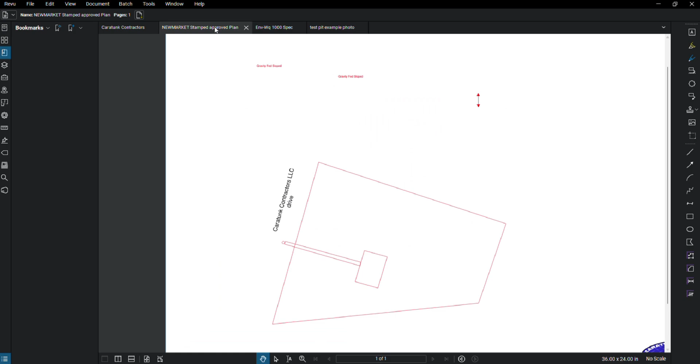First off, go into an example here of a system I installed in Newmarket, New Hampshire. What is a septic plan? A septic plan is essentially a site plan drawn by a septic designer or a civil engineer in New Hampshire, displaying the lot lines. So these are the boundaries of your property.

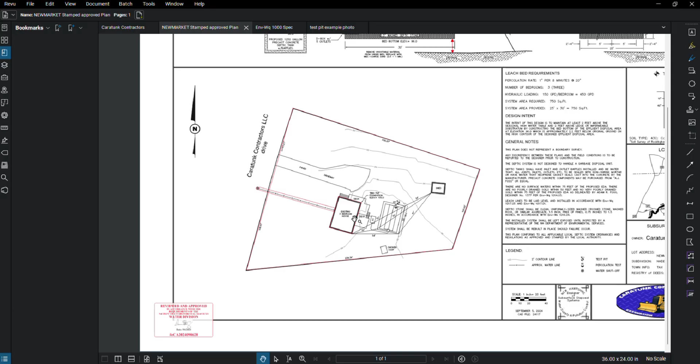The existing conditions of the lot, whether you have a house or you are building a house, there's still going to be existing conditions on every lot, whether it's your contours or a rock wall, or if there's trees over here in the corner, which there were on the system, or if you have a chicken coop, paved driveway, where the street is, that's kind of all on a plan.

Proposed elements will also go onto your plan. So on this system, we just replaced the septic system. There's no installation of a well or anything of that nature. So this was all existing right here. Existing decks, existing house, existing driveway. But on some plans, you will see a proposed well or a proposed addition on a house, or a proposed added driveway. Stuff of that nature will end up on your plan.

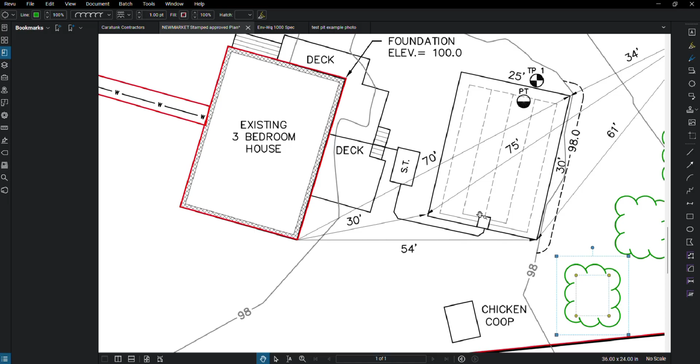And of course, the septic system is on your design. So it has the different components. You have your sewer line running out of your house and meeting your septic tank. So right here is your septic tank. From your septic tank, you have settlement, and out flows the effluent to your system. The basic system in New Hampshire is stone and pipe. It has a D-box in the middle, and it runs to perforated pipe, and it settles into the ground.

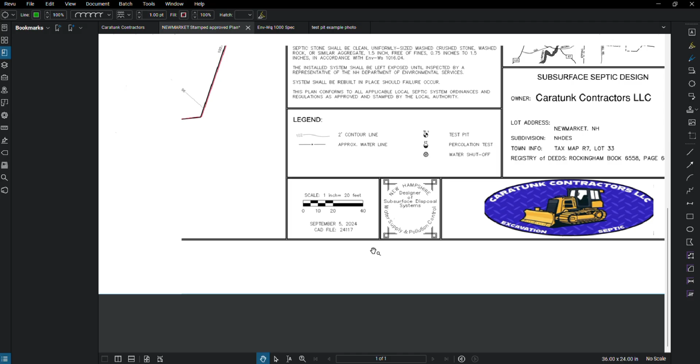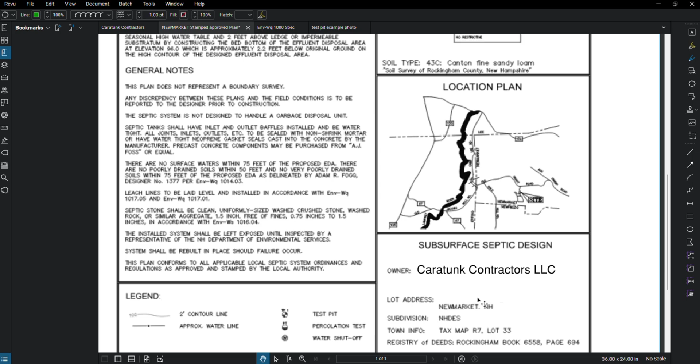You'll also see on your plan the stamp from the designer, the installation company, a scale, a legend. This helps you read where the test pit is, percolation test, water shut off. You'll see the approval from the state of New Hampshire, a compass with your northing, cut section from the side, test pit and its data, a location, owner information, tax lot, stuff of that nature, and your leach bed requirements, design intent, and general notes.

So the next question we've been hearing a lot of is, why do I need a septic design? First and foremost, anytime a system is installed or a leach field is replaced in the state of New Hampshire, a design and approval is necessary. This is a regulated trade within the state of New Hampshire, with installers taking a rigorous 4-hour test and designers taking multiple rigorous tests to complete and secure their licensing/permitting with the state of New Hampshire. This is regulated by the New Hampshire Department of Environmental Services.

The state wants to regulate these systems to ensure clean water and land. A poorly installed system can get people sick, ruin well water, and add disease/bacteria to our state's lakes, rivers, and oceans. Nobody wants kids getting sick swimming in their lakes. Nobody wants to get sick having a glass of water out of the tap. That's why we're here.

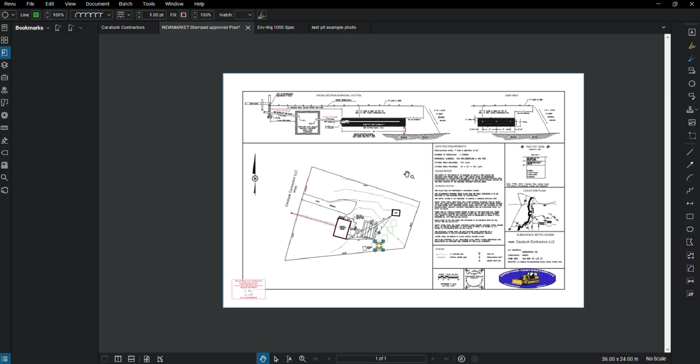Plumbers and septic installers are at the forefront of keeping our communities healthy, and we take that seriously. I seriously believe keeping bacteria out, separating your well water from your septic system, is important. We'll get into all that and how that comes into a design, but that's where we're coming from. That's how a lot of the guys we work with, our competition, ourselves, people in the industry feel about it. So that's why.

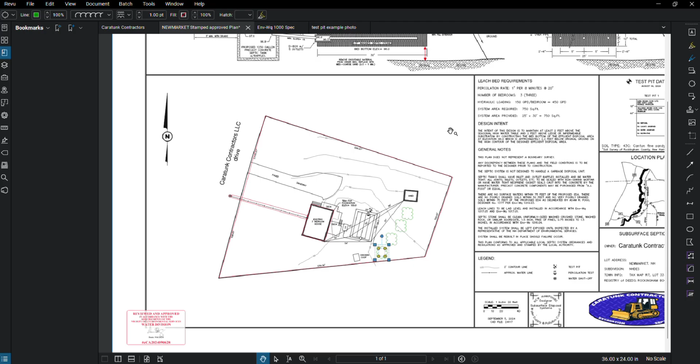Another question we ask here all the time is, what goes into a design? And why does that piece have to go there? Why do I have to have a tank right here is a question I hear all the time from customers. And it's a valid one.

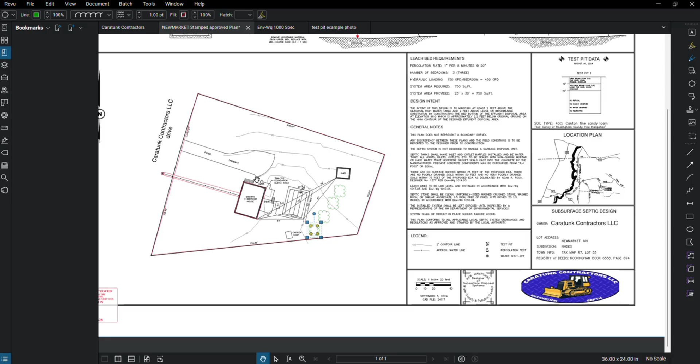So getting into this, essentially these designs are a giant puzzle. The puzzle starts with its boundaries. For example, this puzzle is roughly 227 feet long by 100 feet. So boom, you have the limits of the puzzle.

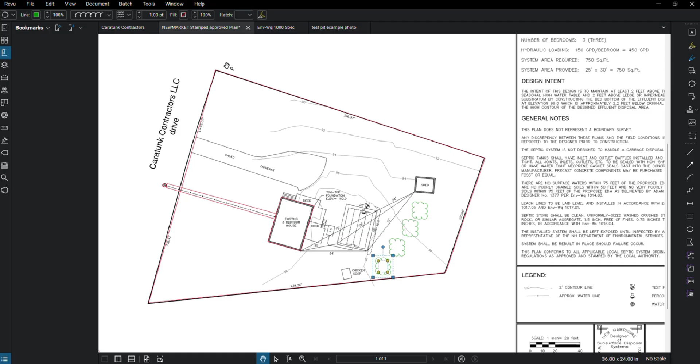Now, sticking with the puzzle concept, let's start dropping in some of the existing conditions. On this, we have a house, we've got some decks, we have a paved driveway, we have a well with a water line, we have a chicken coop, a shed,

we have a hill. This is kind of relatively flat area, and as you can tell with the contours, got a slope. So that's part of the story here. We got trees.

With all these existing conditions, the state spec plays a role. So everything on the plan is kind of formulated in offsets and sizing by the state spec from DES.

So if you go to the spec, you got about 130 pages of everything and anything that has to do with our line of work, including offsets.

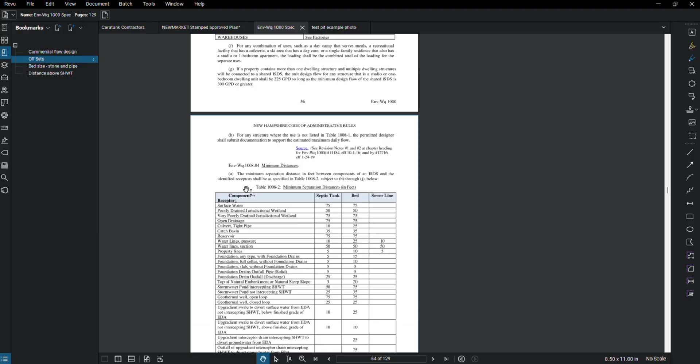So here in the spec, you can see they have offsets of how far your septic tank and your leach field and your sewer line have to be from lake water, property lines, catch basin,

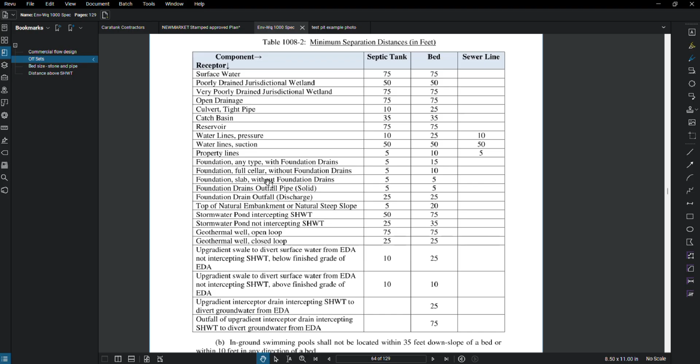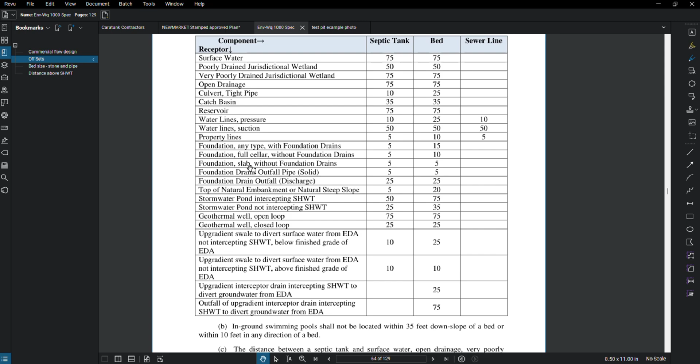you name it, a reservoir. It's in here. Your foundation. So going back to this, all of a sudden all your puzzle pieces have offsets.

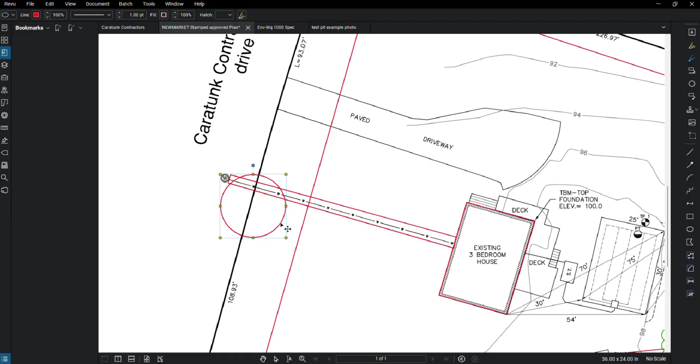And you can't put the components of your septic system within these pieces.

And now the puzzle's kind of shrinking, and you can only fit these different pieces in different places. Now it's kind of shaping up.

The next part of the spec is the size of your system. And sizing these puzzle pieces, essentially, like your septic tank. In the state of New Hampshire, 1 bedroom through 4 bedroom is a 1,250 gallon tank.

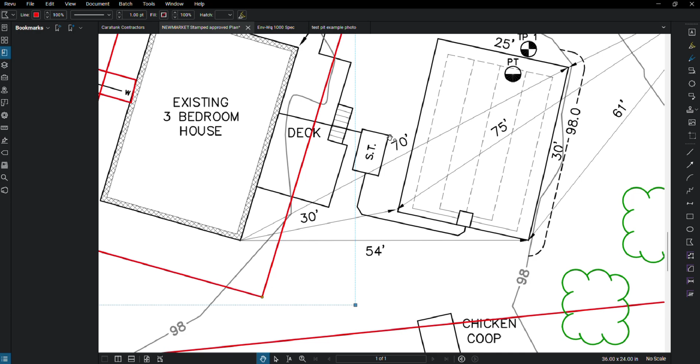And then for every bedroom you add after 4 bedrooms, it's an additional 250 gallon tank, adding 250 gallons to the overall tank size.

So for this example, we're going to a 3 bedroom house. We're in the minimum size. It's a precast 1,250 gallon tank. So we got the size of that puzzle piece.

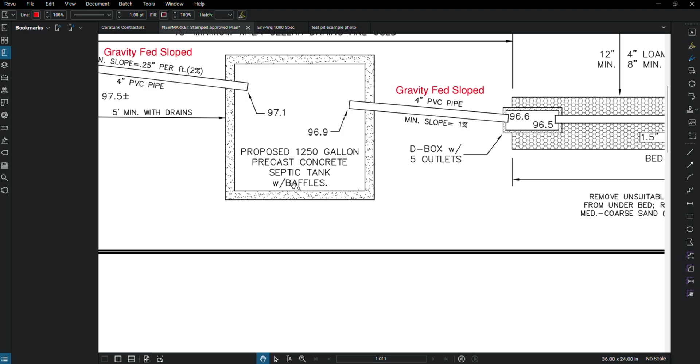Same thing goes for commercial. In the spec, they have a sizing chart on your size tank needed depending on what your usage is.

Same goes for the leach field. The leach field's a little two-pronged. So first, you want to calculate your flow rate. The flow rate is calculated in the spec based on your intended use and how large that intended use is.

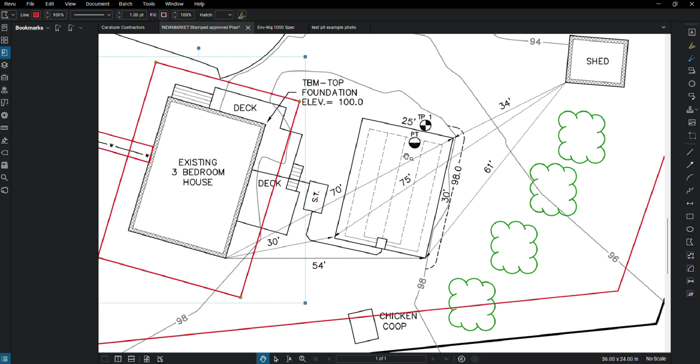So if we go over here, for residential, they have

on this table here the flow rates needed for a 2 bedroom house, a 3 bedroom house, a 4 bedroom house, and for each additional bedroom past a 4 bedroom house.

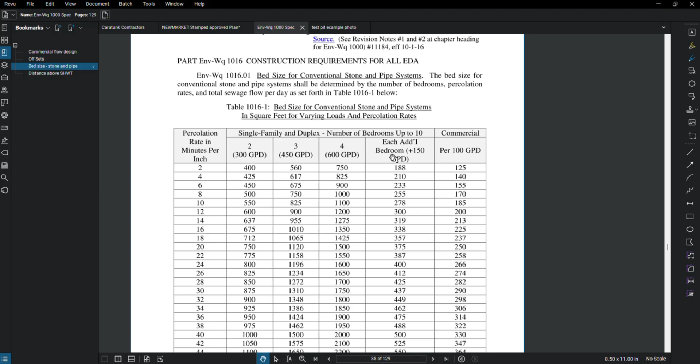They also have a table for how many gallons per day in a commercial use. Commercial uses are found in a different table within the spec.

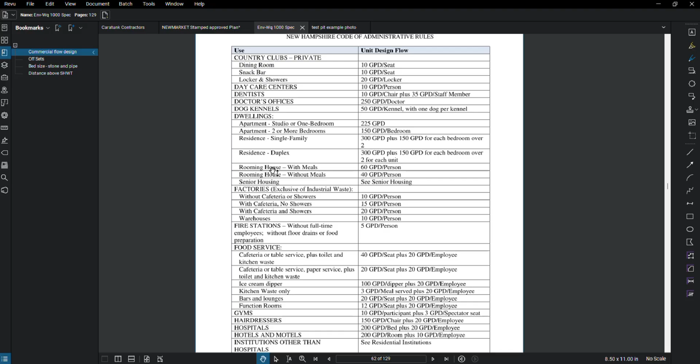They have everything in here. Country clubs, dentists, factories, fire stations, gyms, laundromats, motels, and these are based off of

the number of employees you're going to have, the number of seats at your restaurant, the number of machines in your laundromat, how many doctors, how many kennels for your dog kennel. Everything's in here.

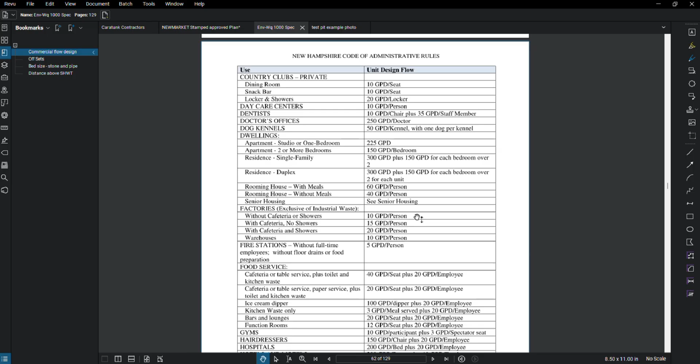You figure out what your usage is commercially, how many seats you're going to have or what have you for the scenario, and you can calculate your flow

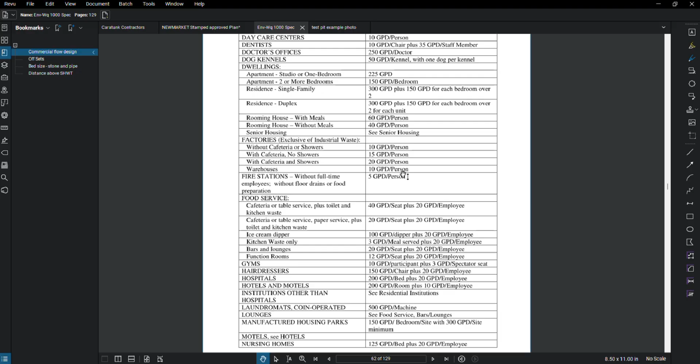rate per day. That allows you to go back to the sizing, and you can figure out this top part of your chart.

Let's hold on here. Do a quick highlight. Got 3 bedroom, 450 gallons per day. Hold that thought.

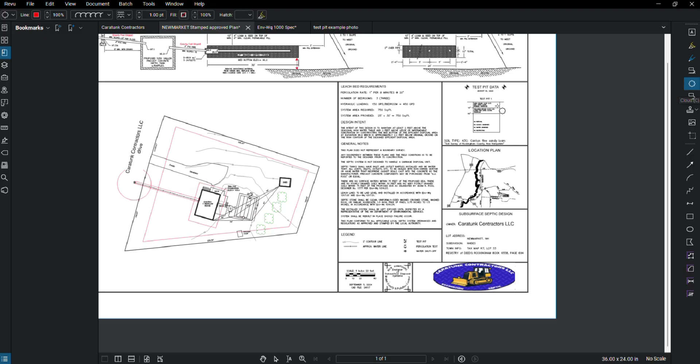Back on the plan, in the corner here, we have our test pit data. Test pit data is going to take a look at the soil type. It's also going to take a look to see if there's refusal. Are you going to hit bedrock? You're going to look at your seasonal high water table. Do you see any water when you observed? Is there a restrictive layer that you came in contact with?

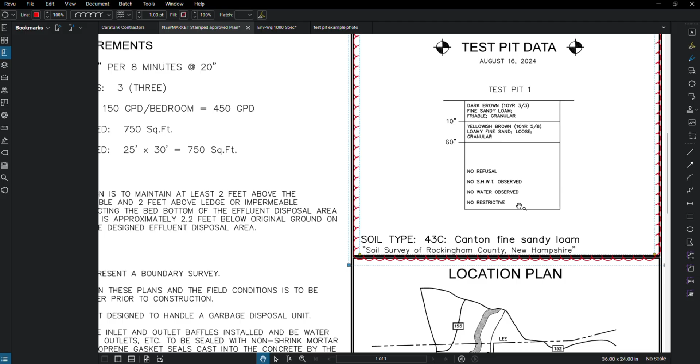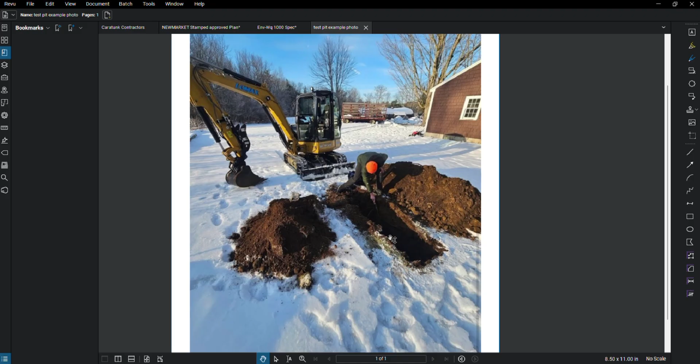Part of the test pit also is performing a percolation test. Percolation rate is figured after saturating the bottom of the test pit. So you're going to dig this hole about 4 feet deep, depends on the system generally speaking. You go a few feet down, you saturate the ground for an extended period of time per the spec, and then you fill up the hole again and you calculate how long it takes for the water to dissipate. In measuring that, in simplest terms, you figure out your percolation rate.

So on this particular system we did, the percolation rate was 1 inch. It dissipated 1 inch per 8 minutes. And you get this info right here.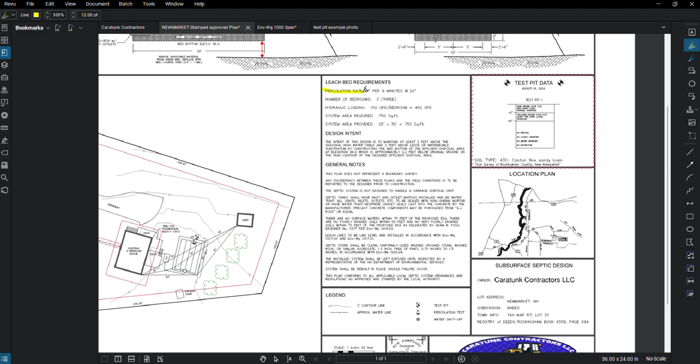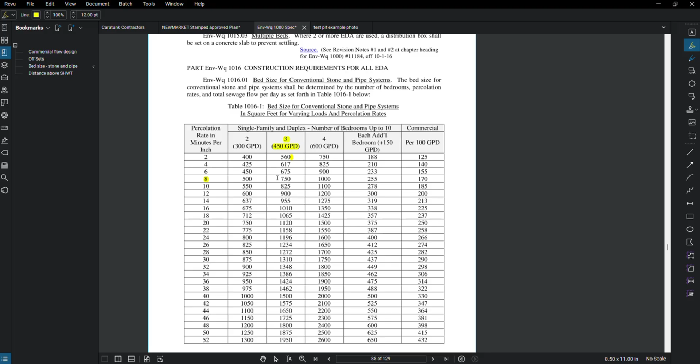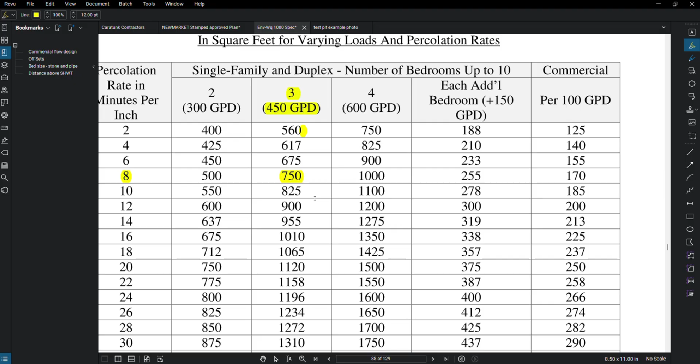Percolation test, we know our use, we know the size of our use - 3-bedroom. That's our flow rate right there, 450. We know it's 8. We're coming down to 750 square feet is the size of our leach field. So we just figured out the size of another puzzle piece within our septic system. 750 square feet. So let's go back to the plan here.

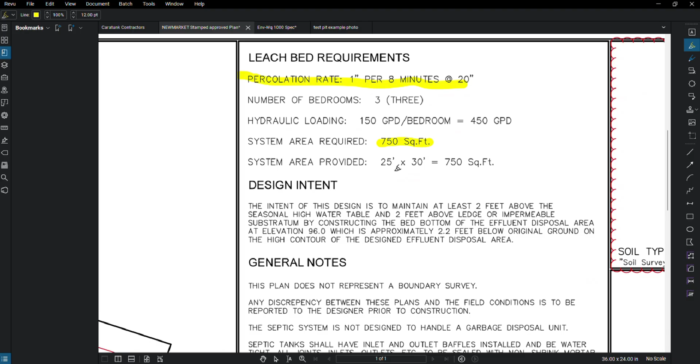You can see the math the designer performs. They lay it all right out for New Hampshire DES to take a look at. And they decided to size the 750 by going 25 by 30 for the field build.

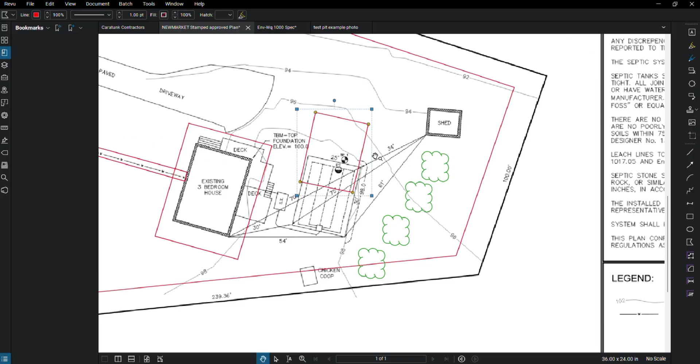So now that here's the size, becomes where can we fit it with the existing conditions? And this designer picked the right spot. Some of the things he was thinking about were, he didn't want to put it in the side of the hill and have to truck in too much fill and cost the customer a ton of money. He didn't want to put it in the way of the shed. He didn't want to be within any of the offsets. He didn't want to put it over here in the trees and have us cut down a bunch of trees

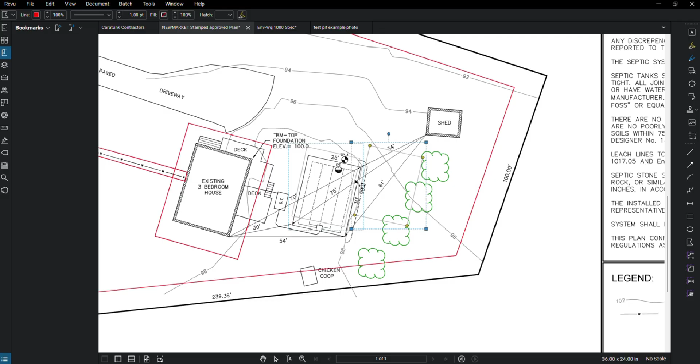and cost the customer more money. We want to do this efficiently and effectively. So he put it right here. It's a good spot, minimal fill. You can see that contour line right there is minimal fill. And that's another puzzle piece, sized and fitted.

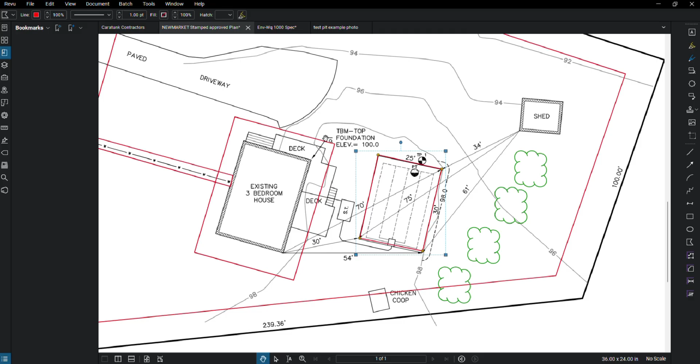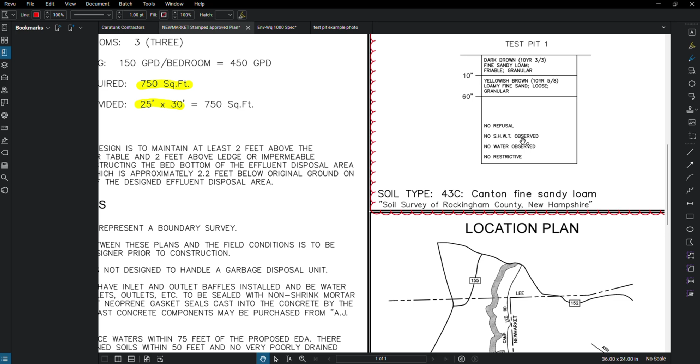So now that we kind of have all the puzzle pieces left, right, up, down, there's another side to this puzzle, and that is elevation. Everything here has an elevation. And going back to this test pit data, we observed the seasonal high water table. In this case, we didn't observe one, but in the state of New Hampshire, there is a difference between the seasonal high water table and the bottom of your system they want to see. They want to see the effluent, for simplest terms, filtered out before it gets to your well water or your water table. They want that separation for the bacteria to do its work naturally, in simplest terms.

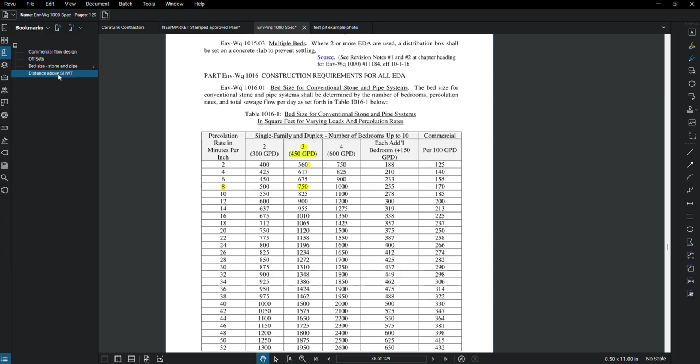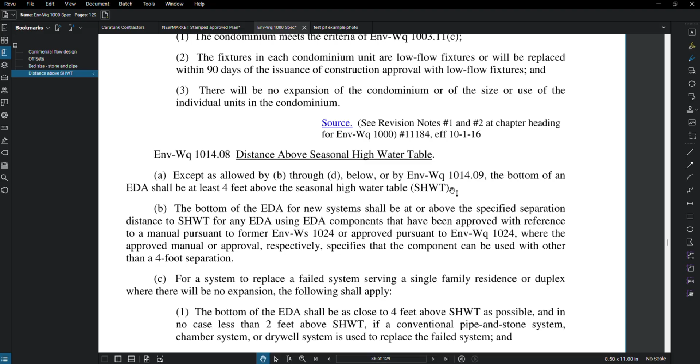So going back to the spec, take a look here. It's a very important piece. And generally speaking, the bottom of an effluent disposal area, EDA, shall be at least 4 feet above the seasonal high water table. Very important piece. Once again, going back to health and safety, you want this separation.

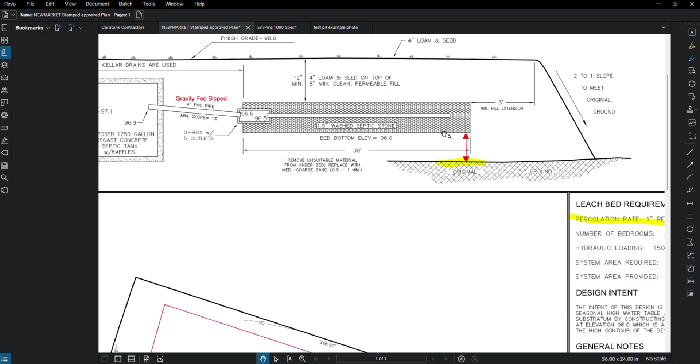So another thing designers have to work out is if they have a seasonal high water table right here and they go 4 feet up, that's the bottom of their system. Do they have the rise and run to go back and hit the plumbing within your house? Do they need to change the elevation on the footings for the proposed house to make this match? Kind of the things they have to start thinking about.

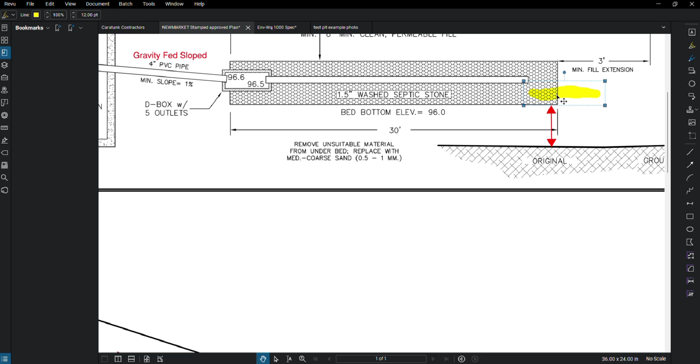If it doesn't make sense, let's say the seasonal water table is up here, that means the bottom of your system's up here. Let's go gray here. Boom, that system's up here all of a sudden. Well, given the state spec slopes that we expect to see in our pipes going from the existing house to meeting this, it's just not going to work. So in the state of New Hampshire, how we solve that

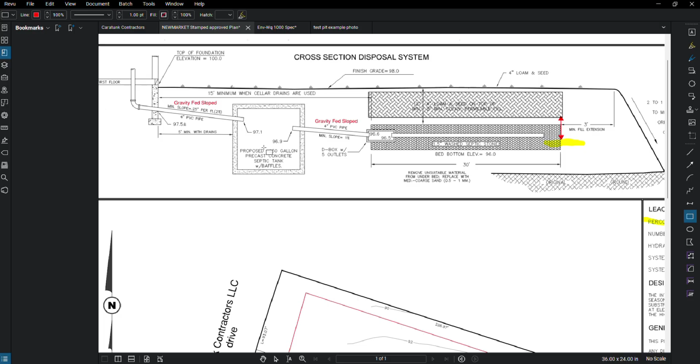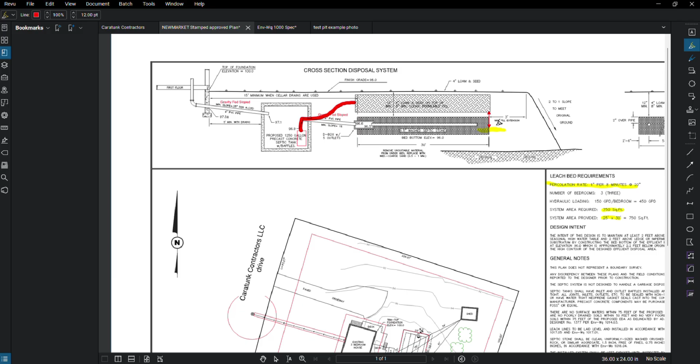is we put a pump, and we pump it up, and that's just another scenario of a puzzle piece, making it fit within the code, within the existing conditions. That's what our designers are doing every day, and our installers are bringing to completion out here in the field.